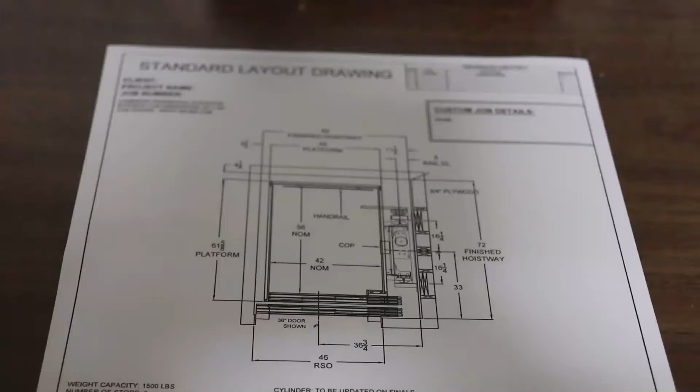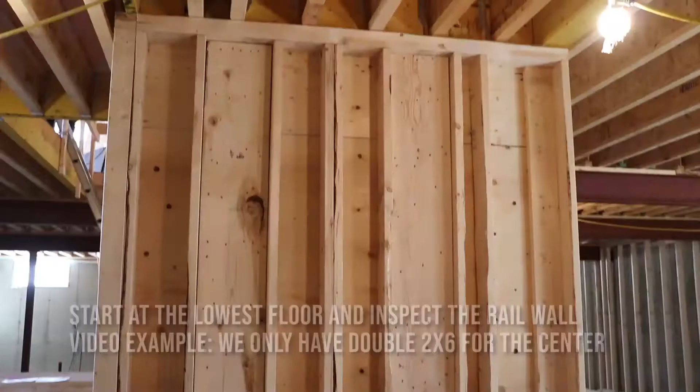Always starting at the lower level, inspect the rail wall, confirming double 2x12s with a triple 2x6 in the center. Now let's confirm from the center of the triple 2x6 to the double 2x12 is 16¼ inches on center on each column.

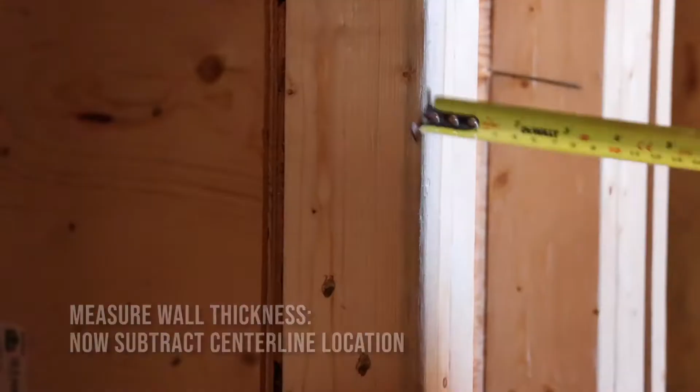Now I'm going to confirm the center line. Here I'm taking a measurement from outside the hoistway to the center of the triple 2x6s. I got 37¼. Take away the 4 inches for the inside of the hoistway, which will leave us at 33¼ inches for the center line.

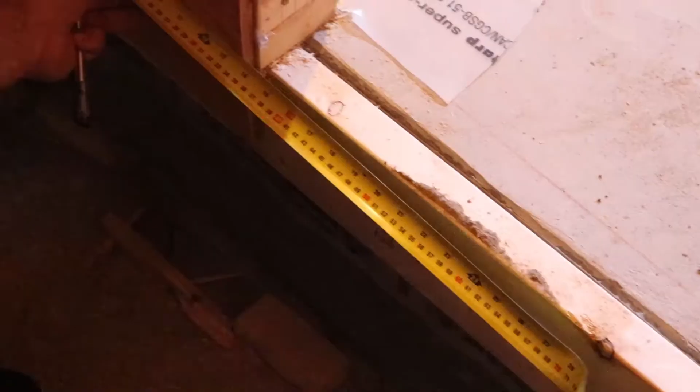Now I'm going to confirm the door center line. So from the rail wall to the center of the opening, at 36¾ inches. So here you see on the layout we have 36¾ inches and 33¼ center line.

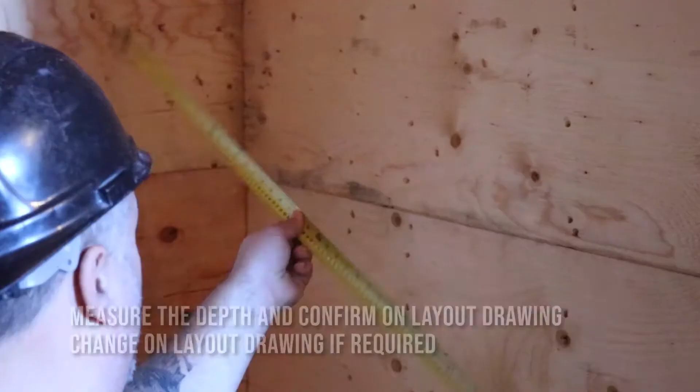I'm going to check the depth. Here I have 72 inches. Now we're going to confirm the width of the hoistway. Here I have 60 inches.

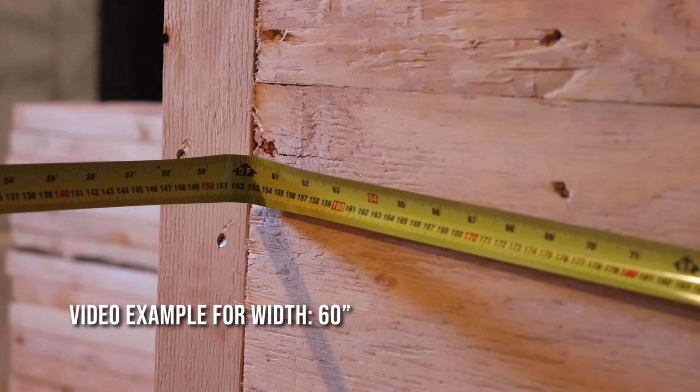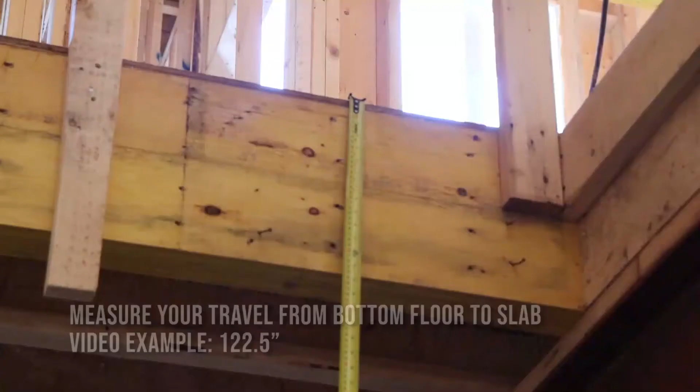Now we're going to measure the elevation. Here's the pit depth going from the pit floor to the top of the slab. I have 17 inches. If you had flooring there, measure to the top of the floor. Now we're going to measure our first floor travel from the basement to the first floor. Here I have 122½ inches.

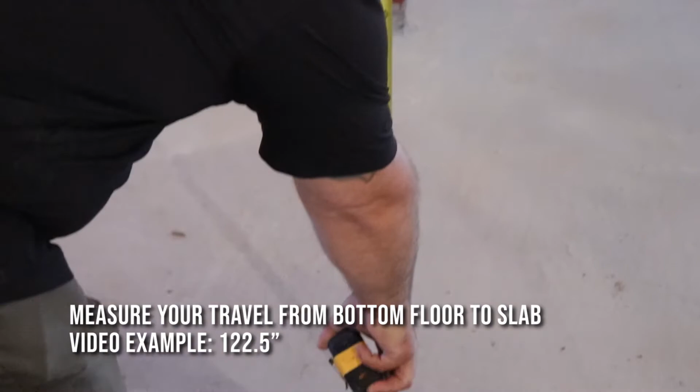Now make any changes that you have on the elevation drawing provided. Our pit has changed and our travel has changed from what was originally on the drawings.

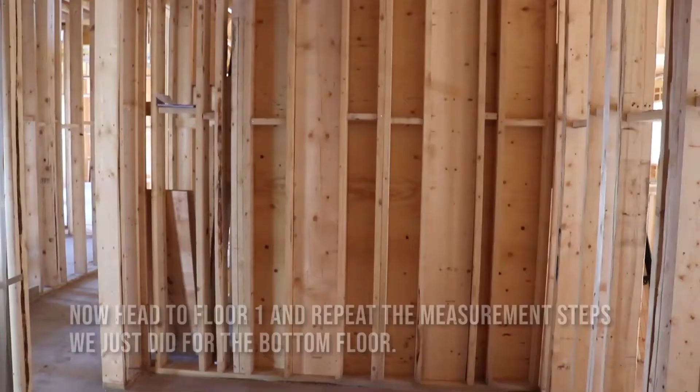Now I'm going to go up to floor 1 and inspect the rail wall there and reconfirm everything that we just did in the basement. So here, confirming 16¼ inches from center of the triple 2x6 to the center of the double 2x12s on both left and right sides.

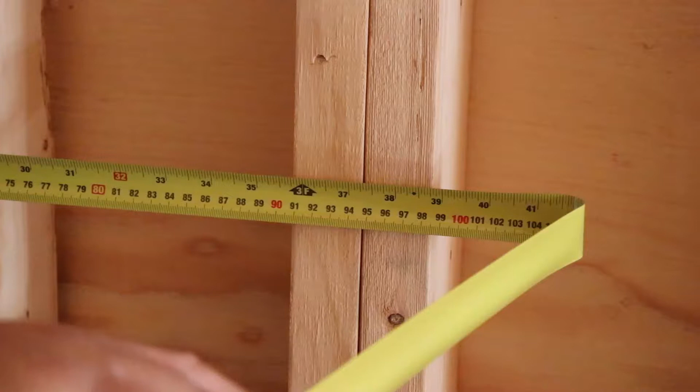Now we'll reconfirm the center line on that floor to the triple 2x6s. So outside the hoistway to the triple would have been 37¼ minus the 4 inches, which will give us 33¼ inches on floor 1 as well.

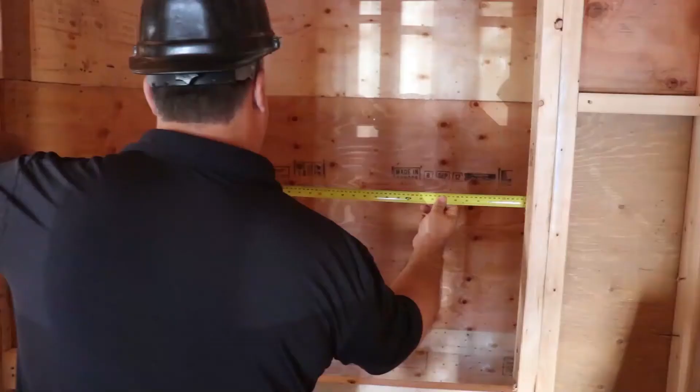Now we're going to reconfirm the depth. Here I have 72 inches. And now let's reconfirm the width. Here we had 60 inches. Just going to reconfirm my center line on this floor here, which is at 33¼ as well.

So you can see here I've just added check marks beside what was correct. And if there was anything that needed to be changed, now is the time you'd want to do it. Always remember to mark down your smallest measurement of the hoistway.

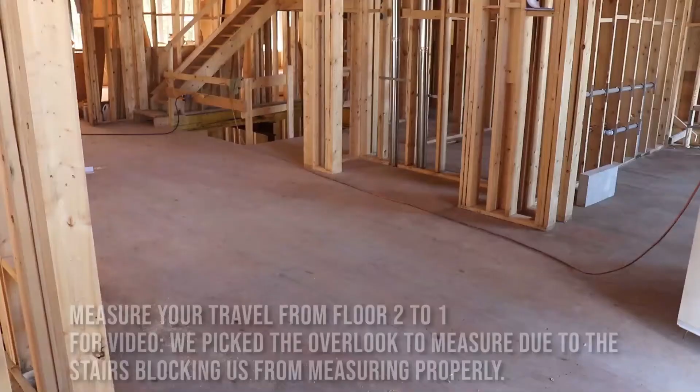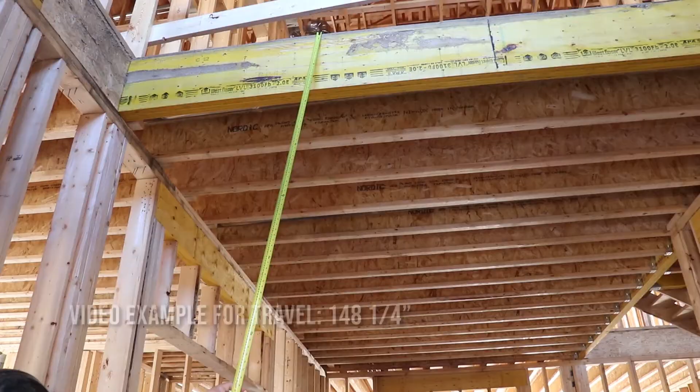Now for safety's sake and not having direct access to measure from floor 1 to floor 2, I've found an opening on a different side of the home that allows me to measure to the same floor that the elevator's on. So here I'm just going to drop my tape on the floor above and measure down to floor 1, which will give us 148¼ inches. Made that change on the elevation drawing.

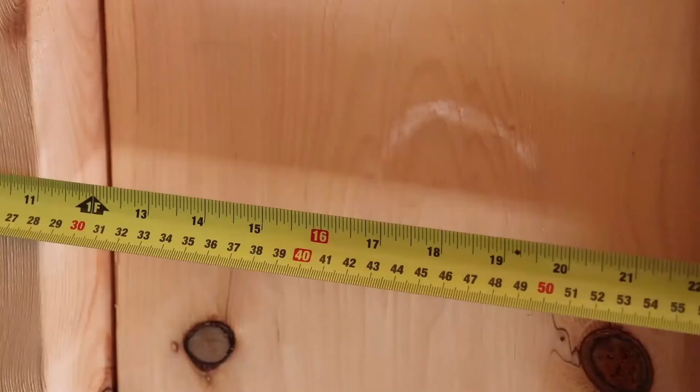And now headed up to floor 2, where you'll see here I just did a shot so you can see that the elevator is actually on the same floor that we just took the measurement from. Now we're going to go reconfirm the rail wall construction. Let's go ahead and confirm that the triple 2x6 to the center of the double 2x12 is 16¼ on center on each side.

Now we're going to go ahead and double check the center line is correct. Here we got 37¼ to the center of the rail wall minus the 4 inches, which will give us 33¼ center line.

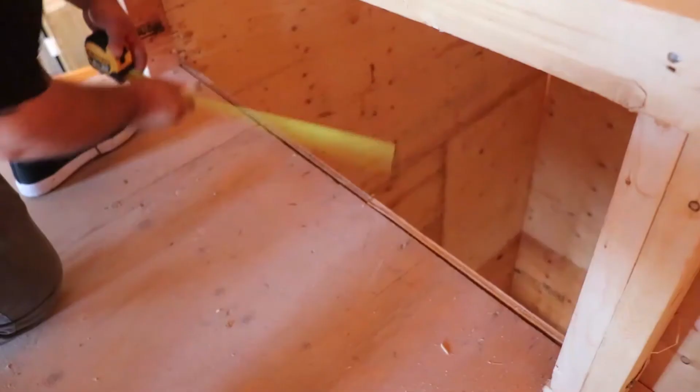Recheck the depth on the third floor. Here again we have 72 inches. I'm going to recheck the width. Again we are correct here at 60 inches. I'm going to reconfirm the center line. Here again we have 36¾.

So now I'm just going to go ahead and make any notes or changes on the layout drawing, but everything is exactly as what was provided from the architect or the designer.

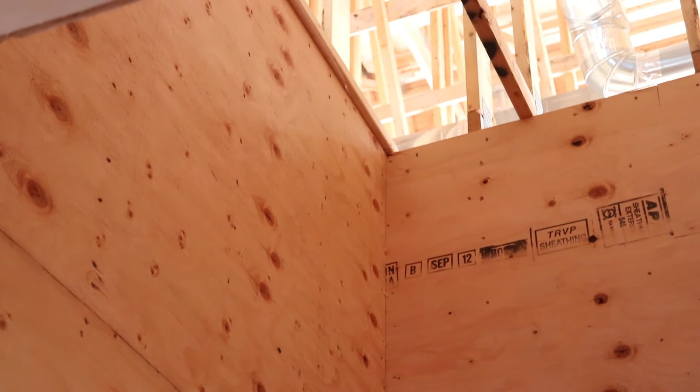I'm going to go ahead and check the overhead. So here I'm just finding a spot where I can get to the top of the rail wall. Just going to hook it on top of the plywood and measure down to the 3rd floor subfloor, and I got 133 inches. As you'll see on the elevation drawing, we actually only needed 108 inches for this project, so we actually have more headroom than what was required.

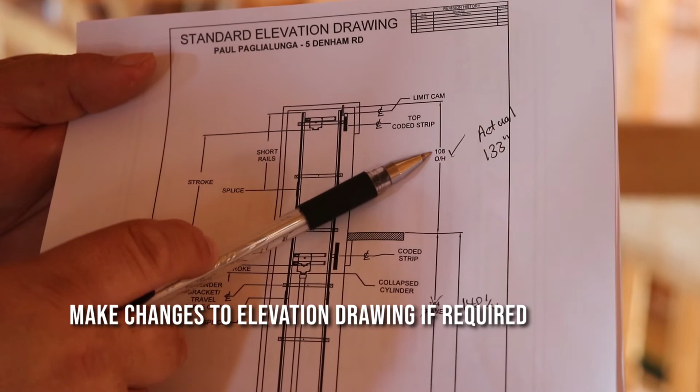So here you see I made all the changes to our elevation drawing. 108-inch overhead, actually have 133, and all our other floors we changed as we went along.

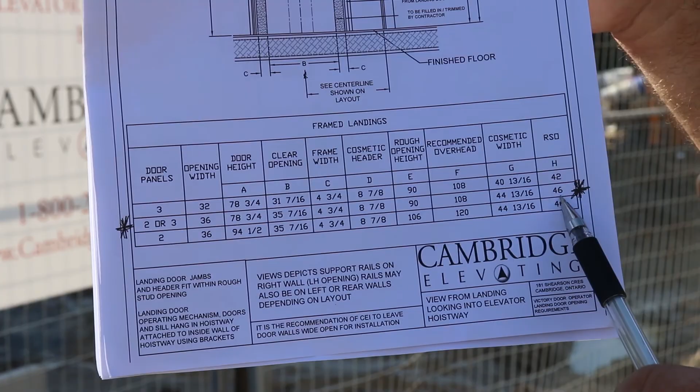This job is a Cambridge, so he's supposed to have an RSO of 46 inches, and his headers are supposed to be at 90 inches. So all the floors were correct. They did measure at 46 inches wide. However, his headers and what they constructed was incorrect.

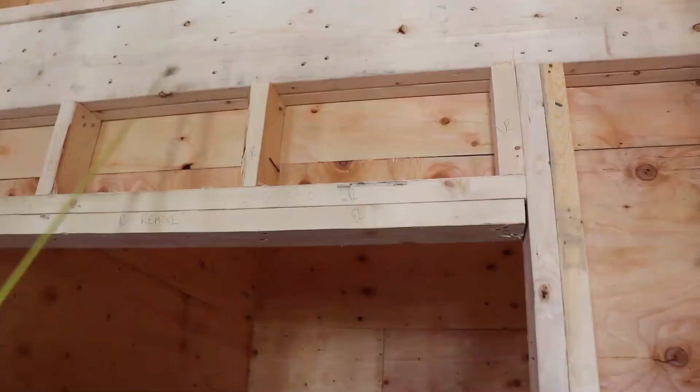Here you'll see he has 90 inches to the bottom of his double 2x10 header that's required. However, his framer decided to drop down some extra supports and frame it up for a swing door, so now he's going to have to remove all that work that he's done, so he has the headers at the proper height and we can install our frames.